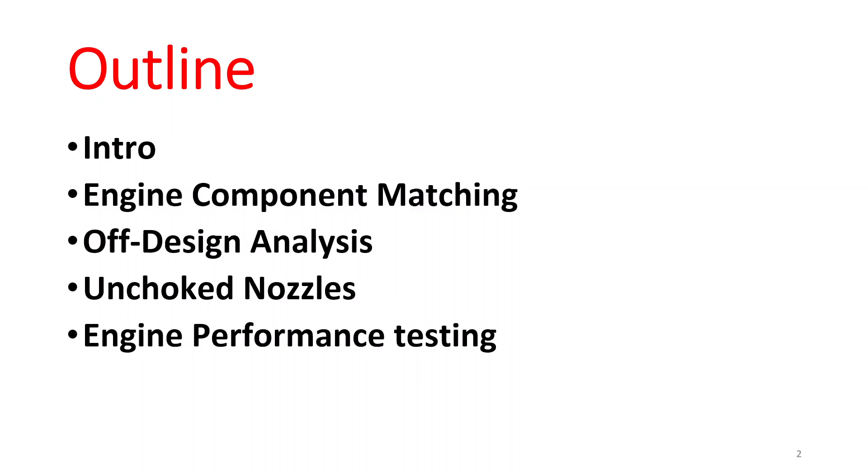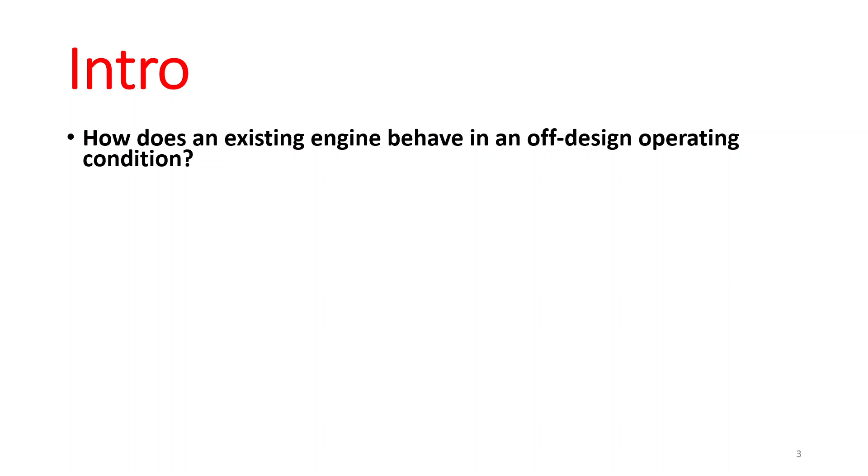So the main question we want to answer in this chapter is how does an existing engine behave in off-design operating conditions? But before that, we have to answer this: what may cause this off-design condition?

There are a couple of things that may cause an off-design operating condition: altitude, which may include non-standard ambient pressure and temperature, for example Arctic flight and seasonal effects, and flight Mach number from takeoff, climb, cruise, dash, approach, and landing.

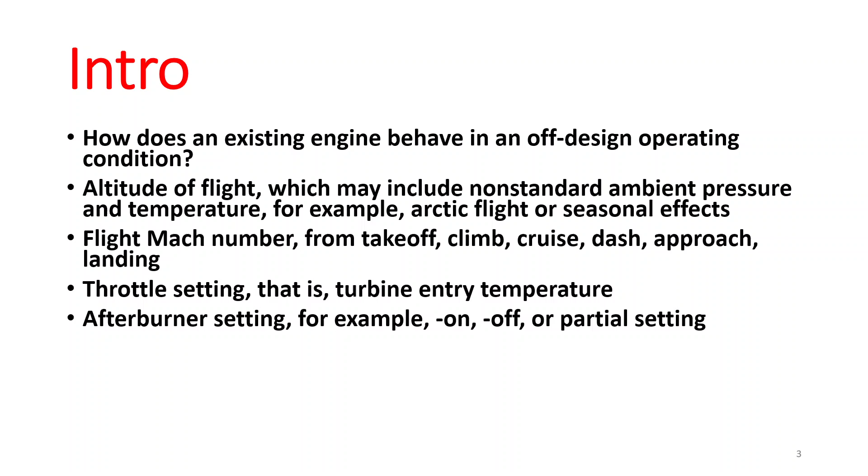Throttle settings, which is the turbine entry temperature. The afterburner settings, whether it's off or on, or partially on or off. So all of these different parameters here may cause an off-design operating condition. Also, the nozzle area ratio, which is usually used to optimize the installed thrust, changing that area ratio may cause an off-design operating condition as well.

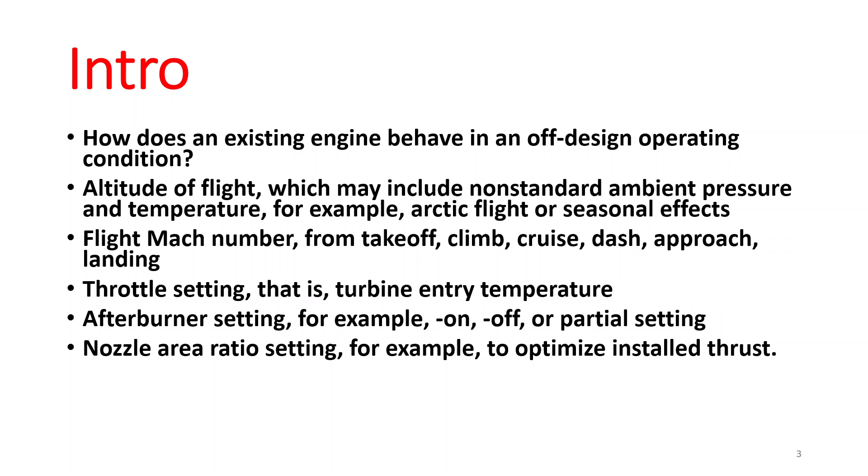So, to figure out how we can deal with an off-design operating condition, we have to talk about engine component matching. We have to be able to match each part of the engine by itself: match the turbine to the compressor to the burner, turbine to the nozzle, and turbine to the burner or combustor, which is essentially the same.

It is a different approach to what we have already done before. We already usually did the marching technique, right? We started from one place and went to another place. But right now we are going to focus on the limiting parameters, like what limits the compressor as far as it's related to the turbine, and how does the turbine limit the compressor's operation. That's essentially what engine component matching is focused on.

And what you want to do, as we always do when dealing with an aerodynamic analysis, external, internal, or fluid mechanics analysis in a more general perspective, is write the physical laws that govern a fluid flow. So the first question is: what are these physical laws that need to be satisfied by the engine components that interact with each other, regardless of their mode of operation? We have a set of physical laws that have to be true no matter the operating condition, whether it's a design or off-design operating condition. It doesn't matter, these laws have to be satisfied.

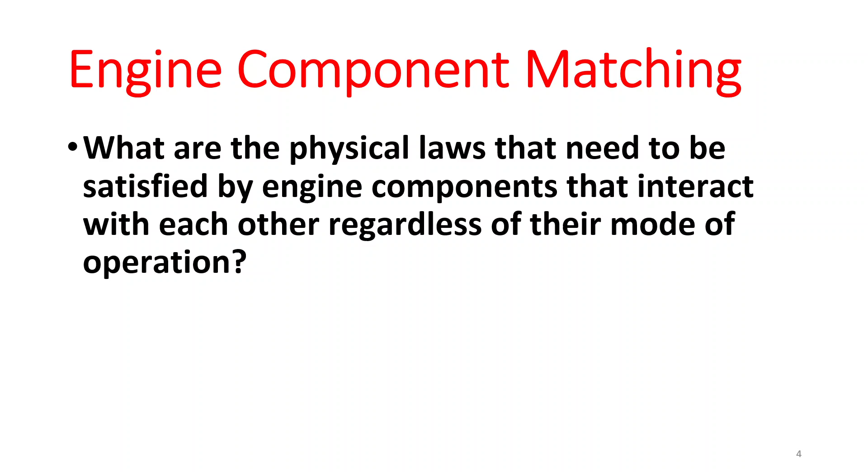Before talking about the component matching, we want to talk about the corrected parameters a little bit. So we define this corrected mass flow rate, the corrected shaft speed, and two other corrected parameters in an engine, mainly because we want to normalize or standardize the engine calculations.

So what you do is define a corrected pressure, which is the ratio of the total pressure at each stage with a reference pressure, and a corrected temperature, theta I, the ratio of the total temperature at each stage divided by a reference temperature. Usually these reference temperatures are sea level conditions, but you can use whatever you want. I would assume all of us will use sea level conditions because all the tables and references you want to use are derived based on sea level conditions.

So with these two new parameters we have defined, the corrected pressure and the corrected temperature, or pressure correction ratio, something like that, we can call it different names. We can actually define a corrected mass flow rate, which we usually show as M dot C I, where I refers to each state. So we can have M dot C0, M dot C1, M dot C2, M dot C3, and that is defined as M dot I multiplied by the square root of theta I divided by delta I.

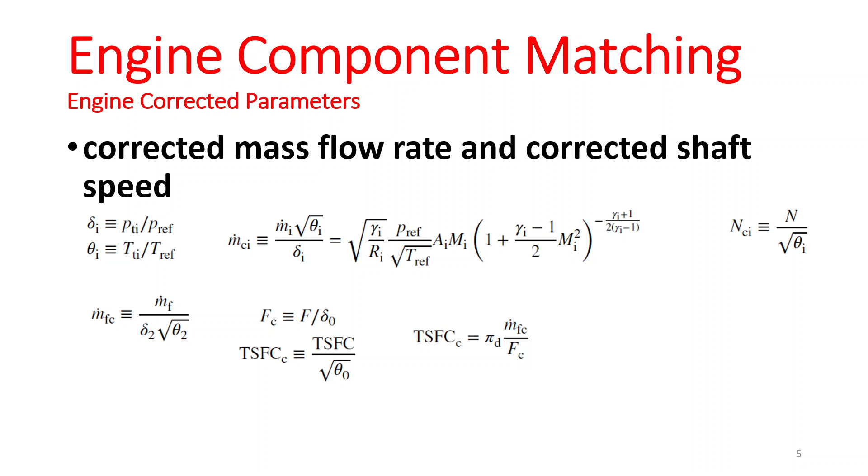The first component we want to match is the inlet and the compressor. The idea is we want to write the conservation equations to essentially find the relationship between the inlet and the compressor. For most of these, we are only going to use the conservation of mass equation to find the relationship, not the other ones.

So conservation of mass: we find the mass flow rate and set the mass flow rate at the inlet equal to the mass flow rate at the compressor. The general formula for the mass flow rate is this, and we've made this formula a little more general than we've already seen, by the inclusion of M sub Z.

This is telling us that we are only talking about the Mach number in the actual flow direction. We don't care about the other components of Mach number or flow velocity here, but we are acknowledging the fact that they may be present. Does that make sense?

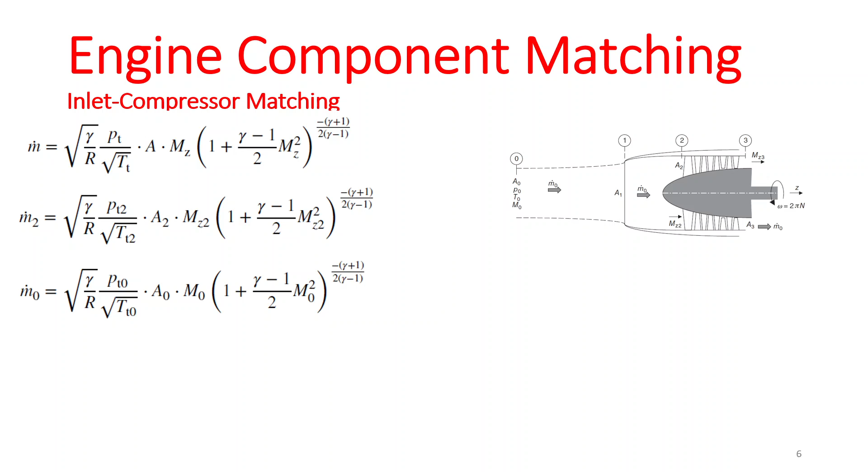Pretty simple, so you set them equal to each other. What can we find from this equality? Essentially we can find the unknown of the problem, which is usually pi of d. The rest is usually known, or whatever unknown you have - you have one equation that helps you find it.

As you can see, these are new equations or new concepts, just a different, newer approach to the problem. So getting a grasp, you just have to make sure you understand the perspective - the equations are essentially the same equation, the idea of conservation of mass, which you've been hearing about for a long time. Any questions so far?

So we are going to march through the engine, and the next thing we want to talk about is compressor-combustor matching. For compressor-combustor matching, if you write the conservation of mass, your m dot 4 is going to be equal to m dot 3 plus m dot f in your combustor - whatever mass coming into the combustor from the compressor plus your fuel mass flow rate.

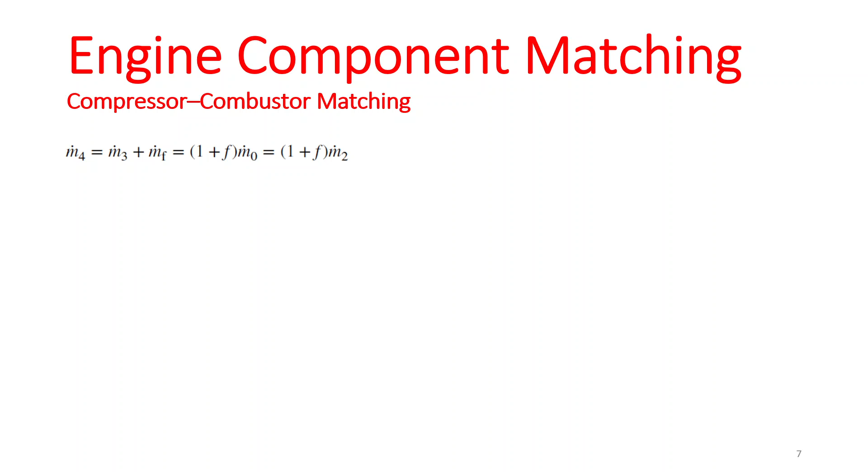We can actually divide everything by m naught and include the f in our calculation. So m dot 4 is going to be equal to 1 plus f times m dot naught, which is itself equal to 1 plus f times m dot 2.

You have to keep in mind that in this type of off-design analysis, we are usually assuming that fuel-to-air ratio is set by the throttle or the pilot. So we are assuming it is a known parameter. This may make the difference clearer between what we are doing now and what we did before. Here we are dealing with a generator that is already designed and in operation. We are not trying to design an optimized engine with an optimized fuel-to-air ratio. Based on this engine that is already in operation, F becomes a known parameter. You don't need to calculate F.

Does that make sense? If you put more pressure on the gas pedal, which you don't have, but if you had a gas pedal, if you put more pressure on it, you're going to get more fuel rate, fuel mass.

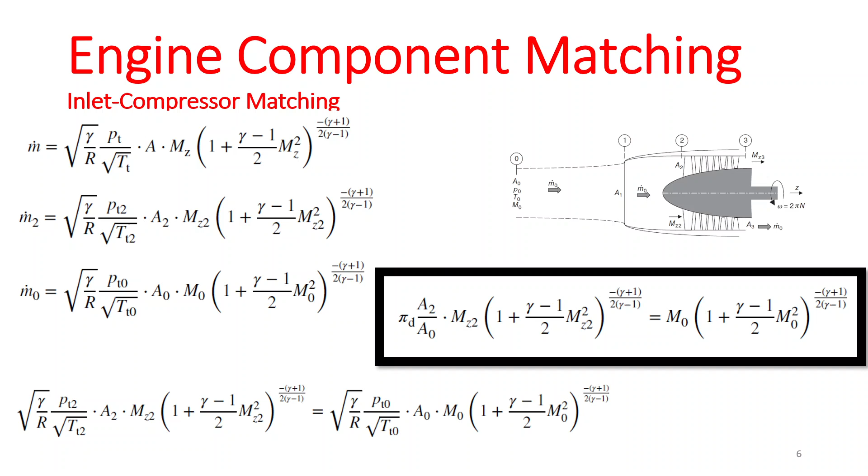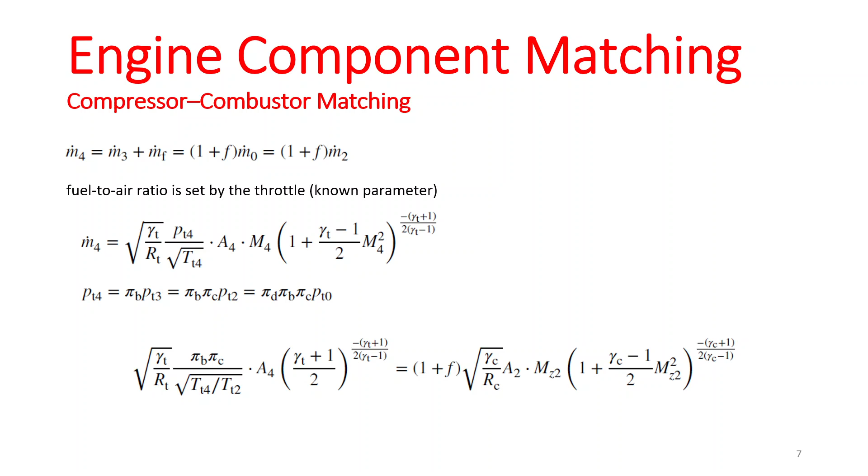So we have this equation, m dot 4, which is your combustor exit. We also have m dot 2 from the previous slide, which is your compressor inlet. Based on the conservation of mass equation, these two must be equal. We have the equation for PT4, so you replace that here. We can also find PT2 from the m dot 2 equation as a function of PT naught. We simplify everything. The only thing to keep in mind is that your gamma for m dot 4 is different from the gamma of the compressor, the cold part of the engine. So we are going to have an equation that relates the combustor to the compressor.

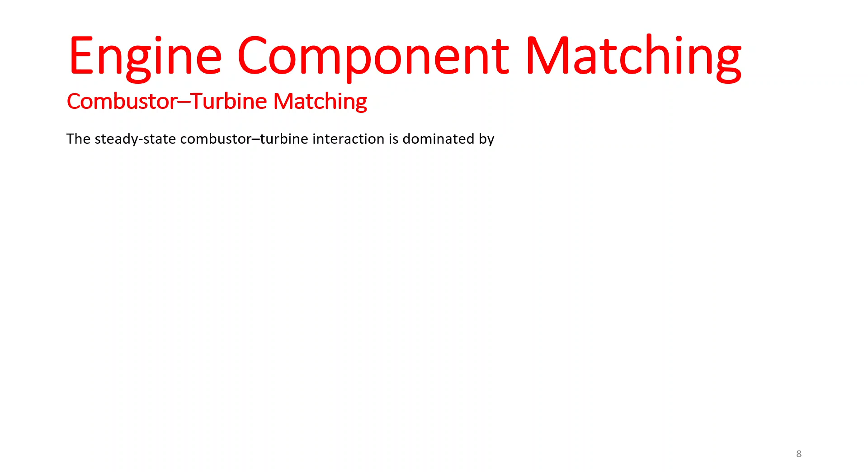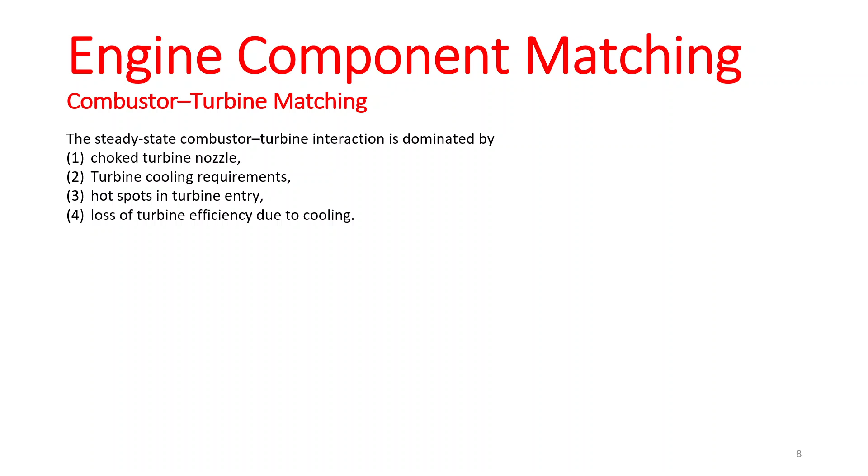The next thing we want to talk about is combustor and turbine matching. The steady-state combustor turbine interaction is dominated by the choked turbine nozzle. That's the first assumption: the turbine nozzle is always choked. Turbine cooling requirements are also a very important factor. Hot spots at the turbine entry play an important role, and loss of turbine efficiency due to cooling plays an important role in the interaction between the combustor and the turbine.

Our goal in the turbine off-design analysis is primarily to calculate the turbine expansion parameter, which is essentially its power production capability. We have a schematic of two different turbines, one uncooled and one cooled. For an uncooled turbine, we can have two different corrected mass flow rates, calculated at the inlet and the outlet of the turbine.

And we can actually find the ratio, the corrected mass flow rate ratio, by the pressure ratio of the turbine divided by the square root of temperature ratio of the turbine. This is pretty simple to get to. To find this ratio, you essentially divide these two equations: m.4 and m.5 must be equal based on conservation of mass, so they cancel out. And you have theta, delta, theta 5, delta 5, which are the ratios with reference temperature and pressures, which are also the same for these two, so they cancel out as well. The only thing that remains is the total pressure ratio for the exit and inlet of the turbine, and the total temperature ratio for the outlet and inlet of the turbine. So you end up with this equation.

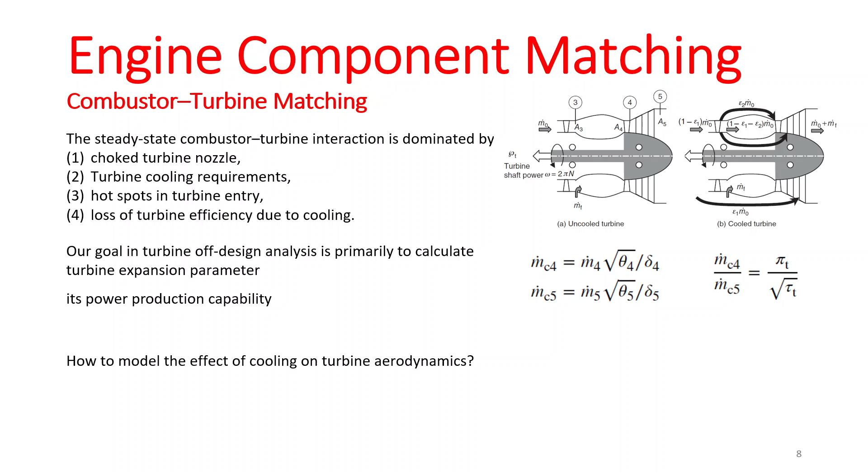So essentially, you are going to get some air from the colder part of the engine to cool the turbine down. What's going to happen to your m.4? It is going to be lower, exactly. M.C would be lower, m.4 would be the same... m.4 itself will be lower because essentially you are using different pipes to get the same amount of air.

It's a little hard for me to draw with my left hand, but the idea here is that there is some mass coming in, and you're taking some of it right here. So this m.5 is going to be equal to m.2, but m.4 here is going to be different than m.2 and m.5, because some of the mass is going to pass through another pipe. And here we're not talking about bypass, right? This is different than a bypass. The concept is not different -- we are essentially dividing the mass, but the purpose is to cool down the turbine. So that's turbine cooling. Does it make sense? But it's not like the bypass there, a bypass in the actual... Exactly, it is -- this is happening inside the engine, inside the gas generator.

The goal of the bypass is not to cool down the...

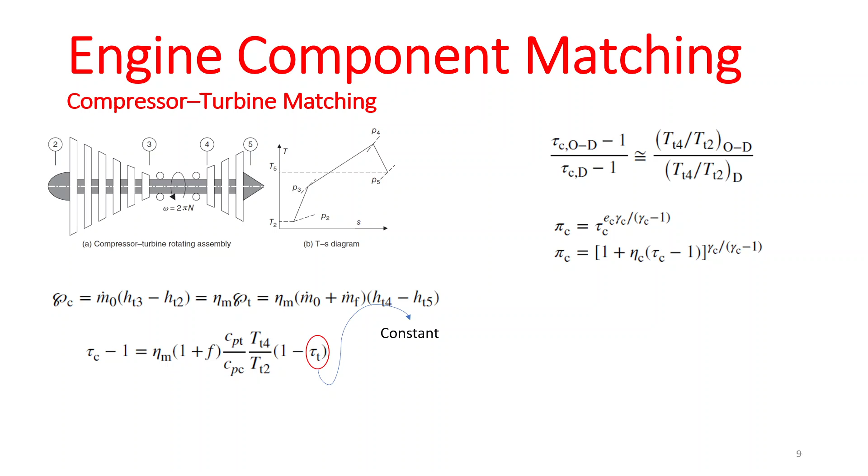But we also have already seen the relationship between the compressor pressure ratio and compressor temperature ratio before, based on the polytropic efficiencies and all of those equations we have already seen, right? So we can actually find this relationship for the pressure ratio of the off-design operating condition as a function of temperature ratio of the design condition, and the ratio of the two temperatures for the off-design condition and the design condition. Does this make sense? Because we already had this equation, and we have seen these two equations from chapter 4. We are just essentially plugging this into this equation.

So this equation is telling us, using the compressor-turbine component matching, you can actually find the compressor pressure ratio of an off-design operating condition using the temperature ratio of that off-design operating condition. That's the temperature after the combustor and before the compressor. And the rest of it, you're supposed to have as design condition, since you are the one who have designed it.

We can actually show that the shaft speed also follows the same pattern. So the corrected shaft speed for an off-design condition divided by the shaft speed of the design condition is also a function of that temperature ratio. The only difference is that we are going to have a square root here. The proof of this is in your book, so if you are really interested in seeing that proof, please refer to your book and find them.

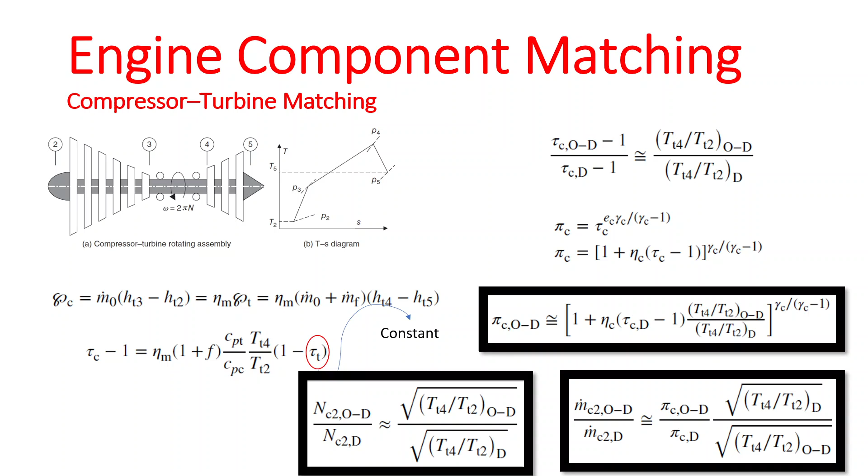So, using these three main equations, we can actually find the performance map of the compressor and the turbine as a function of how far away you are from your design parameter. This is usually called the percent design. This percent design is how far away you are from the operating condition. Is there any questions so far? Okay.

So let's talk a little bit about the pumping characteristics. The pumping characteristics refers to the characteristics that you are dealing with when you are dealing with an existing gas generator. So we have an on-paper aircraft engine, which is a design part, which is something that is not in operating condition, for which you have to find a performance map. But we usually deal with the existing gas generator, for which someone has already found the performance maps and everything else, right?

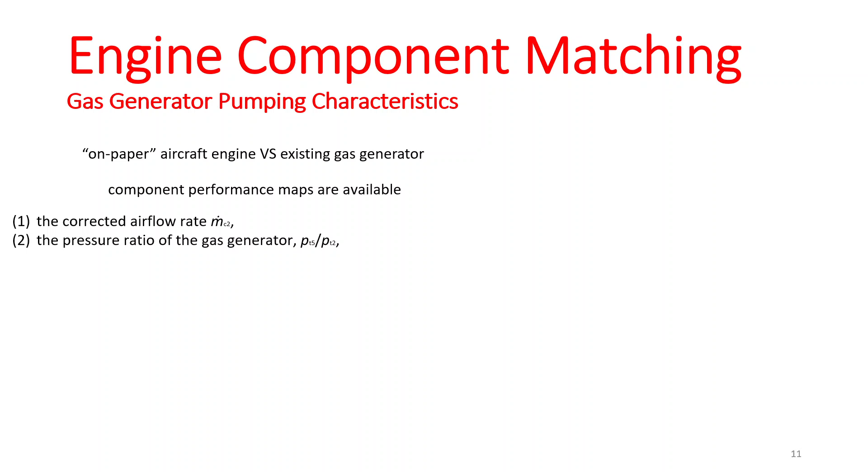When dealing with these existing gas generators, you want to find the pumping characteristics, which are the following. These are called the pumping characteristics. You want to find the corrected airflow, m dot C2, you want to find the pressure ratio of the gas generator, that's the PT5 divided by PT2. The temperature ratio of the gas generator, and the fuel flow parameter, or the corrected fuel flow rate.

These four are called the pumping characteristics. If you were asked to find the pumping characteristic using the performance map or whatever, these are the four that you want to find. Usually when you're dealing with an existing gas generator and someone asks you to find something that is already flying, you go back and find the pumping characteristics, because the performance maps and everything else are already available to you.

The equations you are going to use are essentially the same equations we have already seen many times. But there's one small, interesting note hidden in these equations that I've listed here. The first equation, m dot C2, relates your corrected engine face flow rate to m dot C4, the corrected flow rate at the face of the turbine. We've already seen these equations.

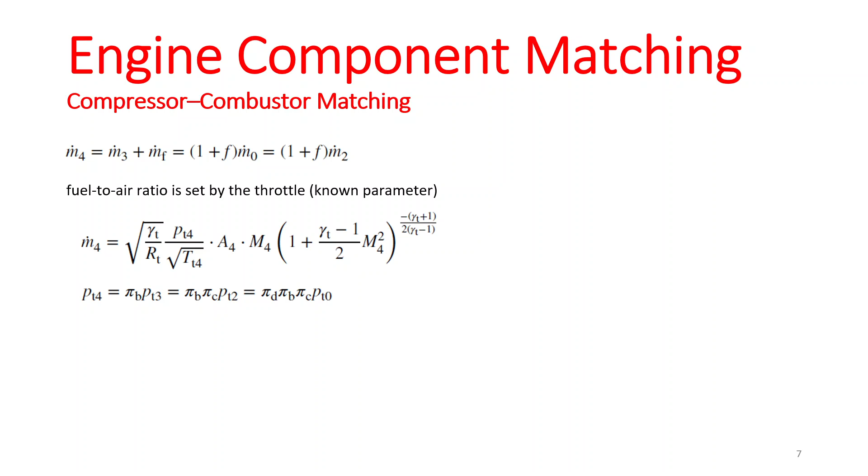So that is going to change the m dot 4 equation that you already have. We've already included the m dot C4, so we've changed that equation to give us the corrected m dot. Recall that m dot 4 was related to m dot C4 using the pressure and temperature corrections. If you plug those in and bring the area of the nozzle to the other side of the equation, this is what you get: m dot C4 over A4 equals the square root of gamma T over R T, times the ratio between the reference pressure and the square root of reference temperature, times gamma T plus 1 over 2 to some power.

What is the variable in this equation? What is changing here? Is the reference temperature changing at all? These are reference values — not a pressure or temperature inside the engine. This is a reference value that you choose, so why would that change?

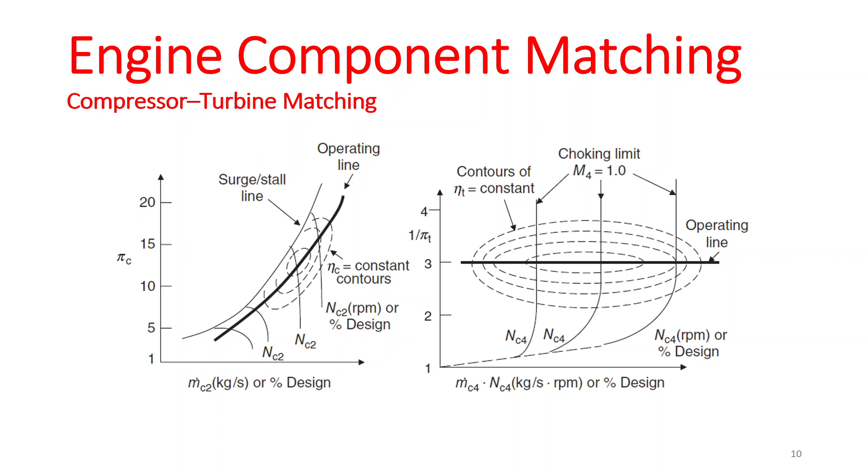Look at the performance map we have here. We have m dot C4 as a function of 1 over pi T. When you have m dot C4 divided by A4 as a constant value, this is going to change. We can divide everything by A4, and this is going to simplify your performance map. Does that make sense? But we will see that.

Is the turbine nozzle almost always choked? That's the assumption, right? That's the assumption we usually make in this off-design analysis. The turbine nozzle is always choked over a wide range of operating conditions, right?

So based on this relationship we have between m dot C2 and m dot C4, we can actually rewrite that equation. Not based on the original equation we already have for m dot, we can rewrite this equation and just plug in m dot C2, and everything else. This is it. Based on these three equations, that's why. So we have this m dot equation for station 2, we have this m dot C4 over A4, and we have this relationship between m dot C4 and m dot C2, right?

So based on these three equations, we can actually find the area ratio at the face of the turbine and the face of the compressor.

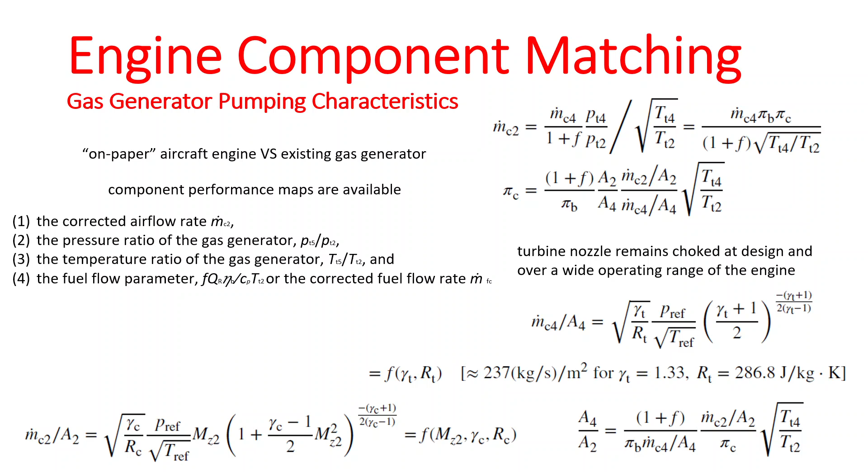Okay, so this is the component matching for a regular gas generator. The next thing we want to talk about is the different types of gas generator or different types of nozzle. We usually deal with three specific different types of gas generators or jet engines: the regular one with only compressor, turbine, and combustor, the afterburning one with an included afterburner, as well as a turbofan. So these are the three main things we deal with.

So let's talk about this afterburner and see what is going to happen here. Okay.

Usually when the afterburner is off in an afterburning engine, we call that condition the dry condition. When the afterburner is on, we call that condition the wet condition, which refers to the fact that you are adding fuel, wet fuel, in the afterburner or not, right? Is there any question here before moving on?

If no, the afterburning part of the analysis is actually pretty simple. Whatever you need to know is listed here, whatever kind of assumption we are making. But the main assumption is that in the convergent-divergent nozzle, station 8 is always choked, right? That's the assumption we always make. If you write the equations, which I didn't include, just the final conclusion from those equations.

If you write those equations, this is what you're going to get. Your pi of t divided by the square root of tau of t for the turbine is going to be constant when the afterburner is off. You can actually make the same conclusion for the case where the afterburner is on.

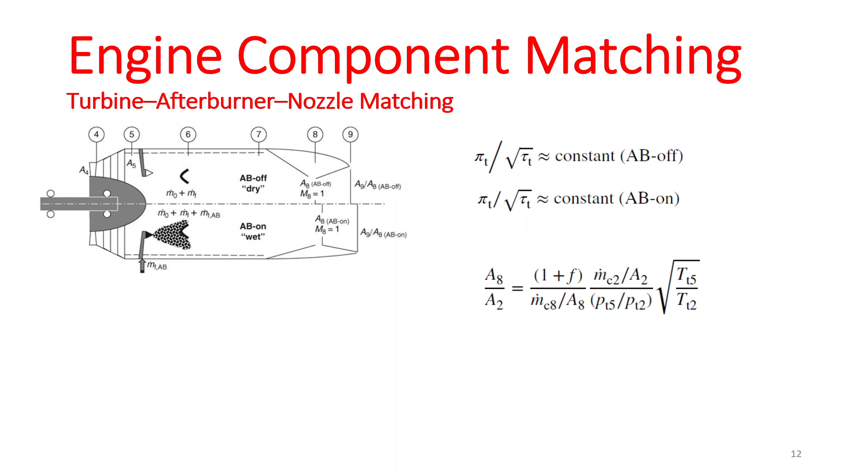So let's move on from component matching, and let's talk a little bit about the off-design analysis. How should we really do the analysis? We've seen just a bunch of equations thrown at us, right? But here we want to get those equations together and figure out how we can use those ideas and equations to do a real off-design analysis.

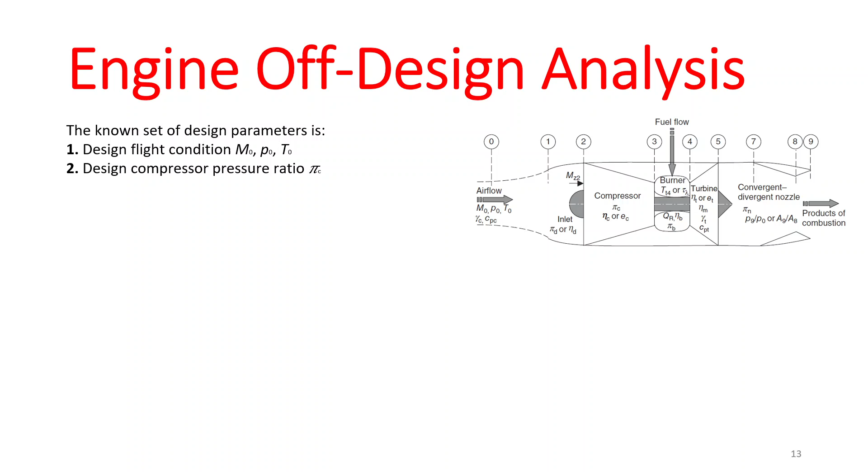The first thing you need to know is the station numbers of each part of an engine, from 0 to station 9, which is your exit station for different engine analysis. The set of design parameters are the design flight condition, the design compressor pressure ratio, the ideal heating value, the turbine inlet temperature, the design component efficiencies, design nozzle exit pressure or area ratio, the gas properties, as well as the corrected mass flow rate, corrected shaft speed, and the axial Mach number at M z2.

But these are the parameters that are very important in a design-based operating condition. What will become important to us when we are dealing with an off-design operating condition? Off-design flight condition, of course, is very important. Off-design turbine inlet temperature, and that's it. So we have 10 important parameters in a design operating condition, and 2 important parameters in an off-design operating condition.

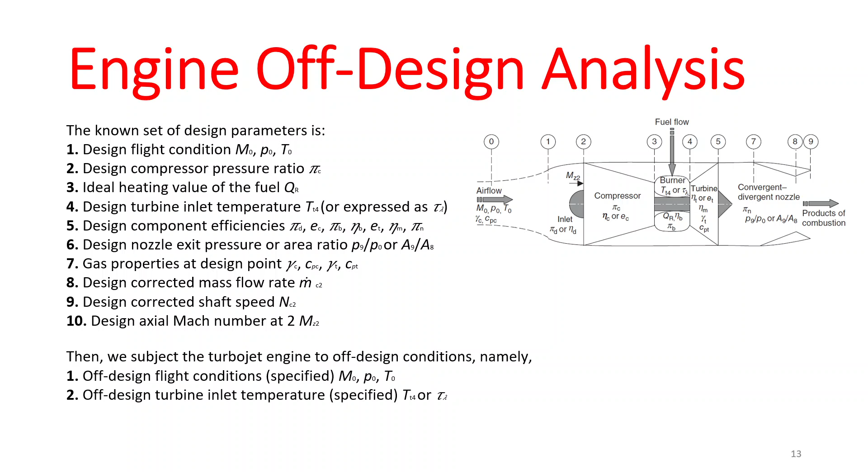But how can we relate the two? How can we use the concepts we have seen to do the analysis? Let's talk about the turbojet engine first, and then we'll go to the afterburning engine, and afterwards we'll talk about the turbofan. Okay?

So to do an off-design analysis of a turbojet engine, we will make some assumptions. The first assumption is that the turbine inlet is choked at both design and off-design operating conditions. The exhaust nozzle is also choked at both design and off-design operating conditions. And this equation is true, which we have already seen: pi of t divided by the square root of tau of t is constant.

So the question I have for you guys before moving on: did we have any relationship that related pi of t to tau of t from chapter 4? Essentially you want to see if there's a relationship between pressure ratio and temperature ratio. We usually know the relationship if it was an isentropic process, right? But when it's not an isentropic process, we actually had this relationship - a very similar relationship. The only difference was the inclusion of the polytropic or small stage efficiency, right? That was the equation.

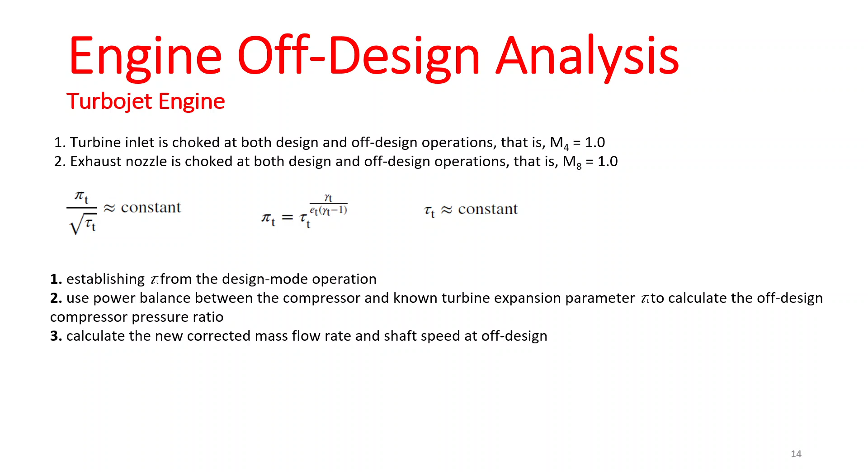So based on what we saw here, how do you think we should deal with an afterburning turbojet engine?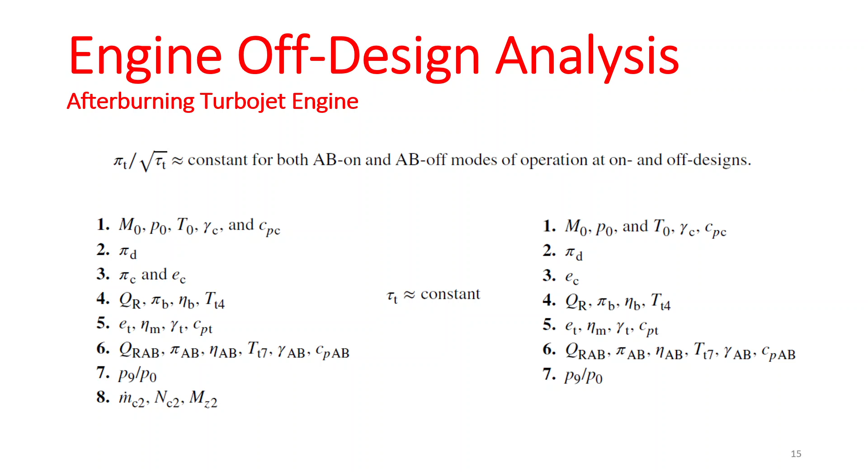Your design parameters, the linking part, is going to be your tau of t, which remains constant, and your off-design parameters. The only thing you really need to calculate here, same as the previous case, is your pi of c.

Is there any questions here? No? We can stop here, or we can cover these parts as well.

Let's talk about this because it's pretty simple. Let's talk about the separate flow turbofan, or the two-spool engines. We make the same assumptions as before: we assume the first nozzle choking station. Essentially, your high pressure turbine entering nozzle is choked, and the low pressure turbine entering nozzle is also choked. And the exhaust at station 8 is also choked.

So the only thing being added here is M18, which we assume is choked, and M4.5, which we also assume is choked. That's the only difference here.

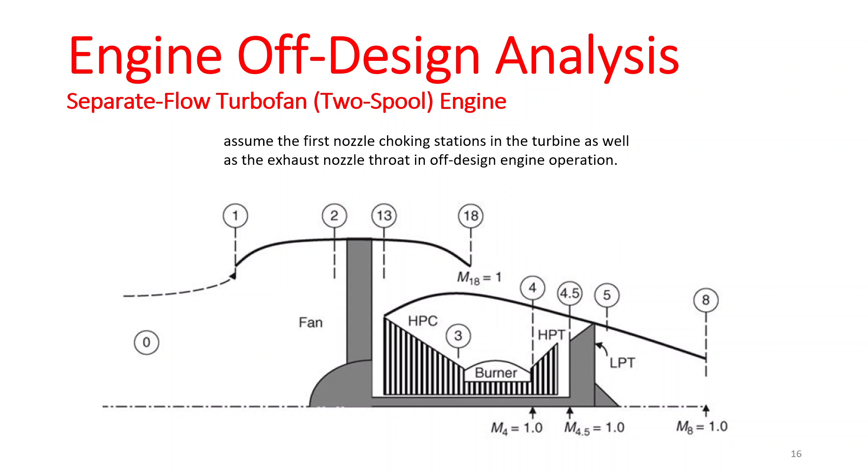Again, we have the known design parameters. The only thing added here is the design bypass ratio as well as the fan pressure ratio, parameters you're already familiar with. For the off-design parameters, the thing you want to calculate is your compressor pressure ratio, your fan off-design pressure ratio, as well as your off-design bypass ratio.

What is the general idea here? The general idea is actually exactly the same. For the low pressure turbine, this ratio remains constant for a wide range of conditions, which means your pressure ratio is also constant. We can say the same thing for the high pressure ratio.

What can we get from the multiplication of the high pressure temperature ratio by the low pressure temperature ratio? Tau T of H times tau T of L, let's multiply them together. So this is the temperature ratio, TT4.5 divided by TT4, multiplied by...

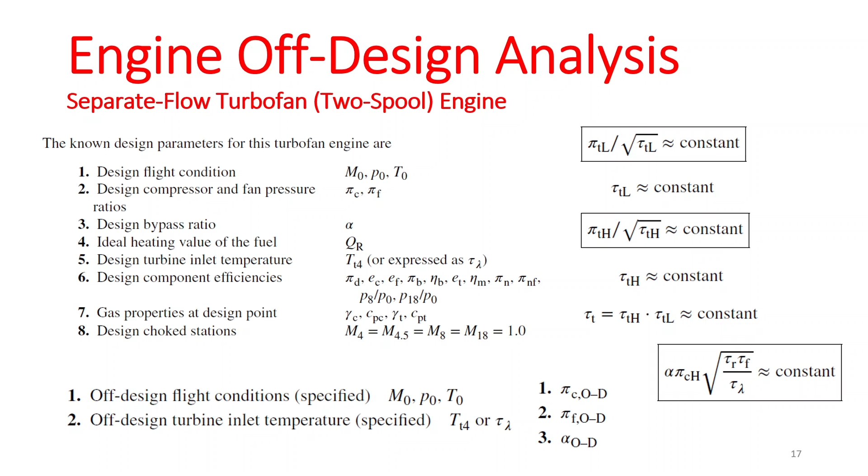Sorry if my hand was interrupting the lecture. It's just these things happen, guys. I'm sorry about it. But let me know if you have any questions.